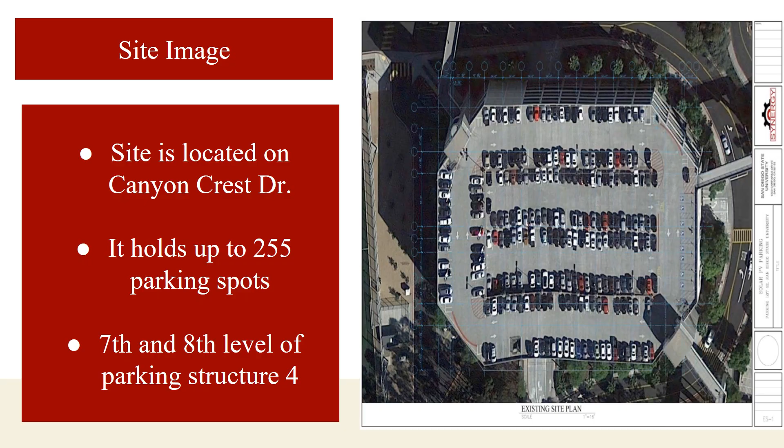After the site inspection was performed, possible column attachment spots were marked, as viewed on these images.

One of the main sustainability aspects of installing solar panels in parking structure 4 is saving energy and money. Considering that solar energy is a renewable source, installing the solar panels will benefit SDSU in the long term.

To determine whether the project would be sustainable, the team gathered data on parking structure 1's power generation with solar panels installed, as well as the total roof area of parking structures 1 and 4.

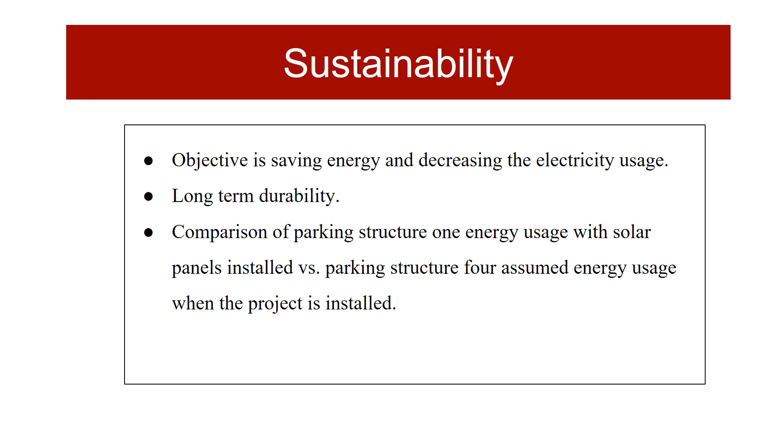The team compared the two parking structure sizes and, based on the available data, assumed what parking structure 4's power generation would be when the project is complete.

Based on the data, parking structure 4's roof area is bigger than parking structure 1's. Using the electrical meter usage of parking structure 1 per day and per hour, the team made an assumption for what parking structure 4 would generate.

Once the project is complete, the parking structure would generate around 650 kilowatts per day based on the data given.

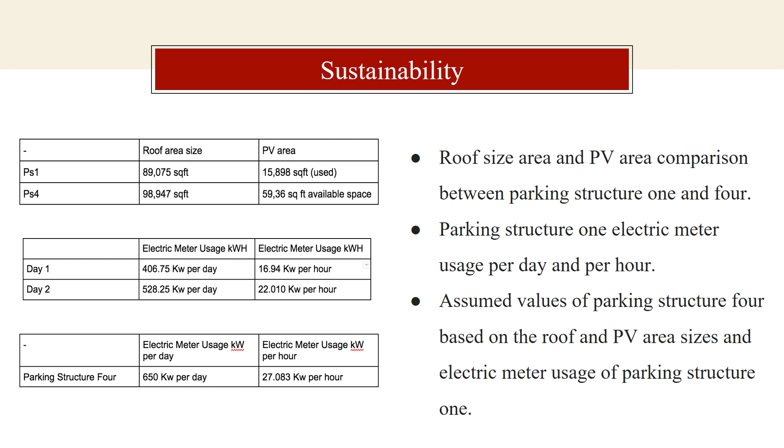This graph presents the solar panel power generation in PS1 compared with power usage.

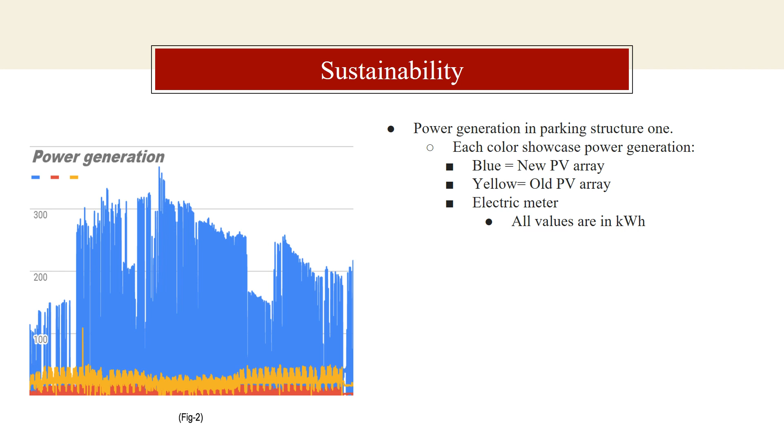For the design criteria, we needed to follow specific codes. Some of these are ASCE 7-10, for minimum design loads for buildings and other structures, and the AISC 360, the steel construction manual.

Also ACI 318-14, the building code requirements for structural concrete, and CBC 2016, the California Building Code.

The design of the solar panels must meet the following design requirements. We needed to determine the PV panels per steel framing layout.

We also needed to follow vehicular vertical clearance requirements, and calculate dead load, live load, seismic load, and wind load to meet the required criteria.

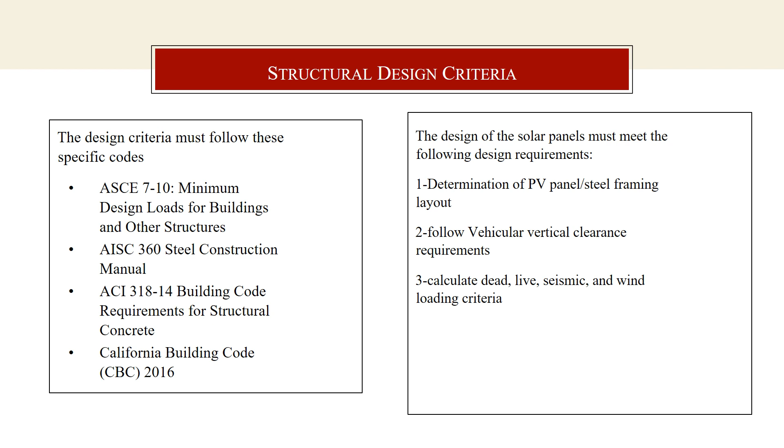While designing the structure, we wanted to maximize the number of solar panels without blocking sunlight or decreasing the number of parking spots. The design will consist of 6 canopies.

The total number of parking spots will not be affected by those canopies, and the total area that will be covered is about 30,000 square feet, about 30% of the total area of the parking structure.

The canopies can be built on top of existing poles due to their relatively lightweight, which would ease the design of the structure.

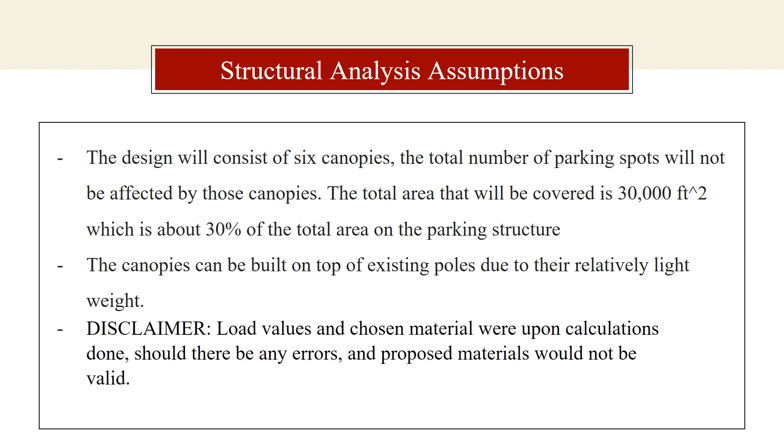Material structural properties play an effective role in any project. In this project, there are certain steel section characteristics that should be followed. For example, all base plate caps should be A572 grade 50.

Also, high strength bolts should be A325. Additionally, machine bolts and threaded rods should be used, and these should be A307.

In addition to these steel aspects, there are a number of specifications with regard to concrete compressive strength.

Slab-on-grade has a compressive strength of 3000 psi, while suspended slab beams, columns, and foundations have a compressive strength of 4000 psi.

Furthermore, the reinforced bars have the following characteristics: Number 4 diameter or smaller with a yield strength of 40 ksi, and Number 5 diameter or larger with a yield strength of 60 ksi.

This project also has certain dead load criteria. For example, the self-weight of PV panels and frames is 4 psf. The live load, representing allowance for maintenance construction, also accounts for 4 psf.

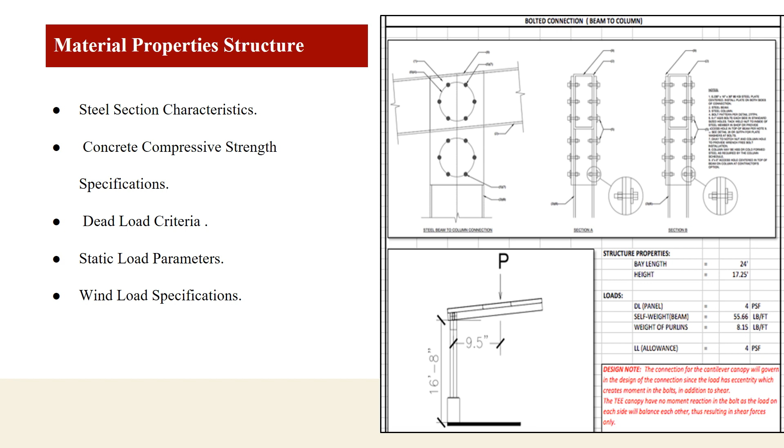The structural calculations for this project vary from simple to the most complex. Therefore, software was used to determine the complex calculations. The software used in this project is STAAD Pro.

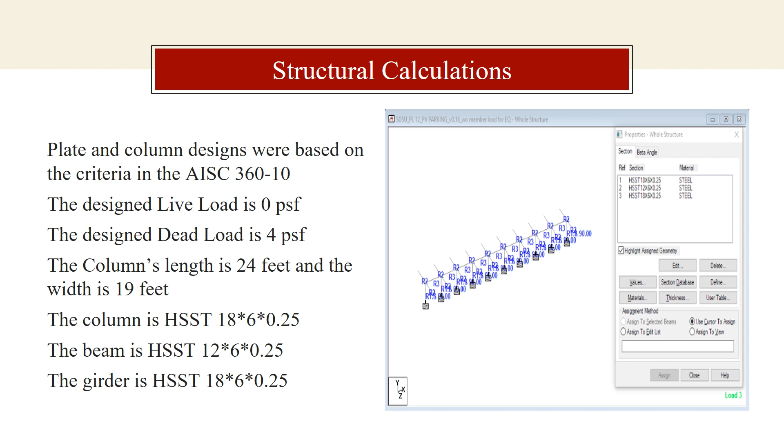As for the solar panel design, according to CBC (California Building Code), the solar panels will be placed for every 24 feet, which includes 3 parking lots. The dimensions, width and length, of each parking lot should be 8 by 19 feet.

Additionally, the weights of the solar panels and beams were investigated so that they follow the design criteria of CBC and ACI. Moreover, we used the V-shaped solar panel because it is cost efficient and one of the easiest solar panel structures to build.

Furthermore, ACI was used to design the anchorage of the steel canopy to the existing concrete parking garage and to check the capacity of the parking structure to resist these reactions.

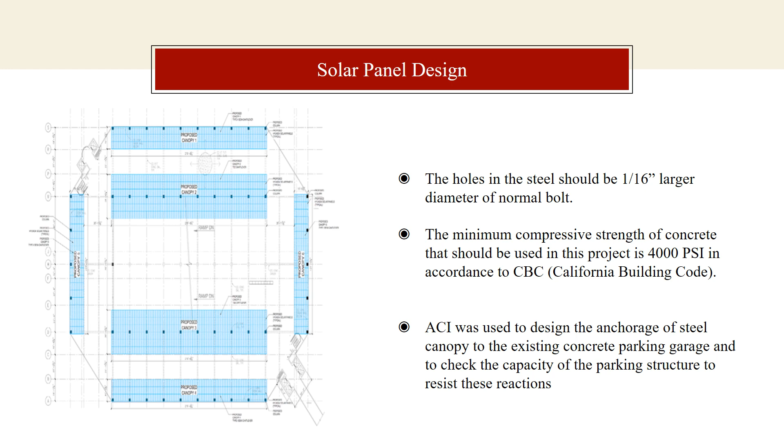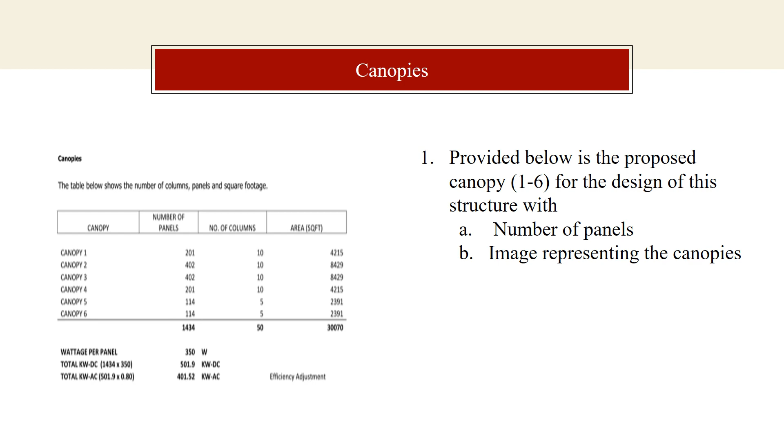Provided below are the proposed canopies 1 to 6 for the design of this structure. The table on the left shows the number of columns, panels, and square footage area of each canopy. For canopy 1 and 4, the number of panels is 201. For canopy 2 and 3, the number of panels is 402. And finally, canopy 5 and 6 have 114 panels. The total number of columns across the canopies was 50, with a total area of 30,000 square feet.

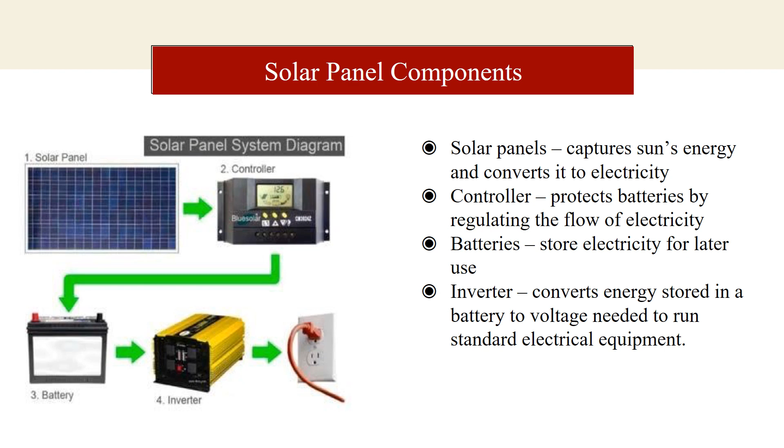For the installation, the solar panel support structures are erected using heavier gauge structural steel columns and steel structural beams with light gauge purlins that support the solar modules. These structures typically have a galvanized finish, and the foundation includes exposed concrete above grade to protect the columns from possible vehicle damage. The system design is highly site-specific.

During this process, we review contract drawings and make sure all drawings match the specs and have a common sense of coordination. If there are any changes in drawings or legends, we always make sure the design stays within budget; otherwise it becomes an issue and can lead to a change order.

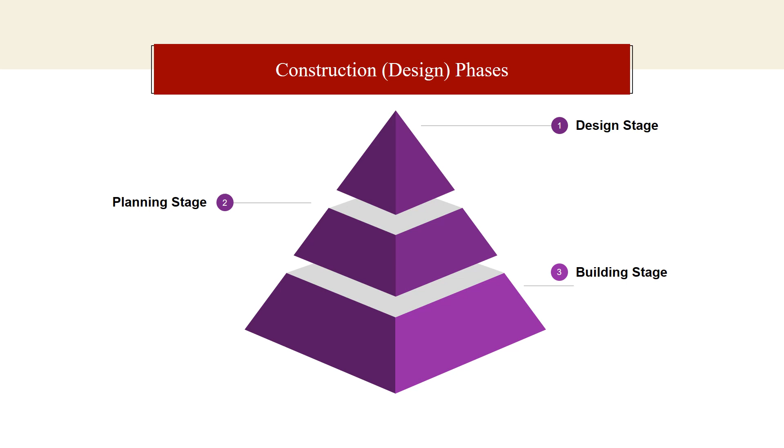The last is the building stage, the final stage. This is basically reviewing all trades doing their job. We make sure everybody follows good safety standards, that trades do not fall behind schedule or cause delays, and we always verify that the design is being met and followed as instructed.

Overall, the purpose of this project was to reduce external sources of energy, lowering the energy bill of the university, provide additional shade for the university, and lead a sustainable way of life and campus as our main goal.

Our recommendation for this project regards the canopies. The number of panels and the design shown represent the specific design of 6 canopies, chosen to cover the maximum area of the parking.